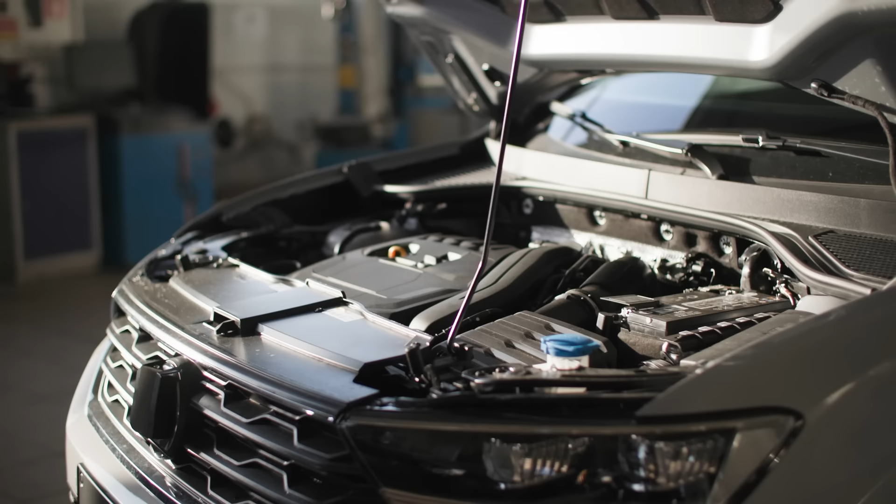Most drivers don't realize this, but engines hold grudges. Everyday habits, like stomping the gas, aren't just bad, they're brutal. Over time, these little mistakes can cause big damage. Skipping maintenance? That's practically asking for trouble.

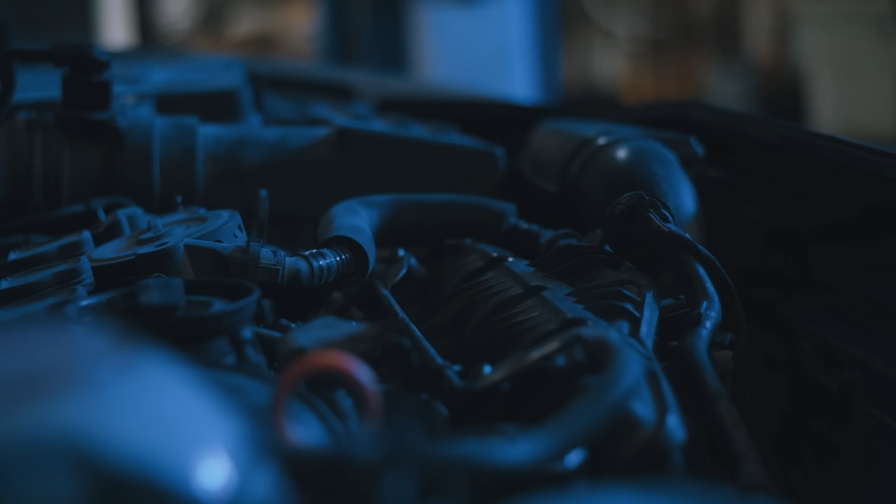We're diving into 9 habits that stress your engine. Each one might sound harmless, but the damage adds up fast. The good news? You can avoid them easily. Stick around until the end, and I'll even share a bonus tip. It's simple, effective, and could save your engine's life. Ready to break some bad habits?

Let's dive in. Habit number 1, running a motor low on oil or no oil at all. When oil levels get too low, parts of the engine don't get enough lubrication. This causes more wear and can shorten the engine's life. As the oil gets lower, the engine starts to overheat.

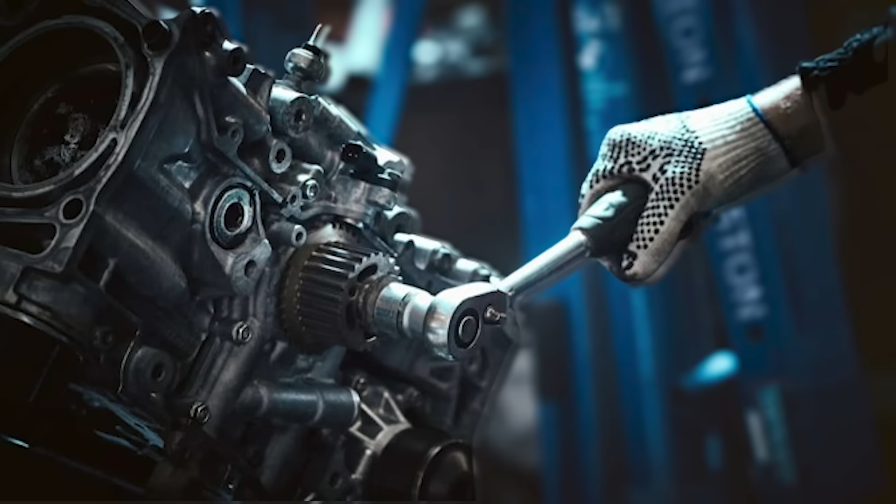If the oil reaches a critical temperature, it loses its ability to lubricate properly. That's when things get dangerous. The engine temperature spikes and the engine may seize. In worse scenarios, it causes parts to weld together. At that point, your engine is finished.

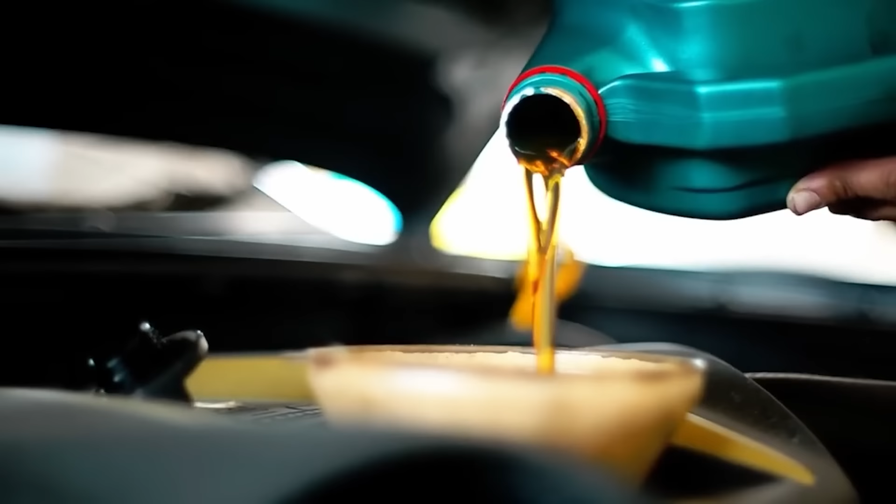Habit number 2, constant low RPM driving. Driving at low RPMs all the time, known as lugging the engine, can actually be pretty rough on it. When you're driving at low RPMs, especially with a heavy load, the engine doesn't get enough oil, coolant, or airflow to keep things cool and well lubricated.

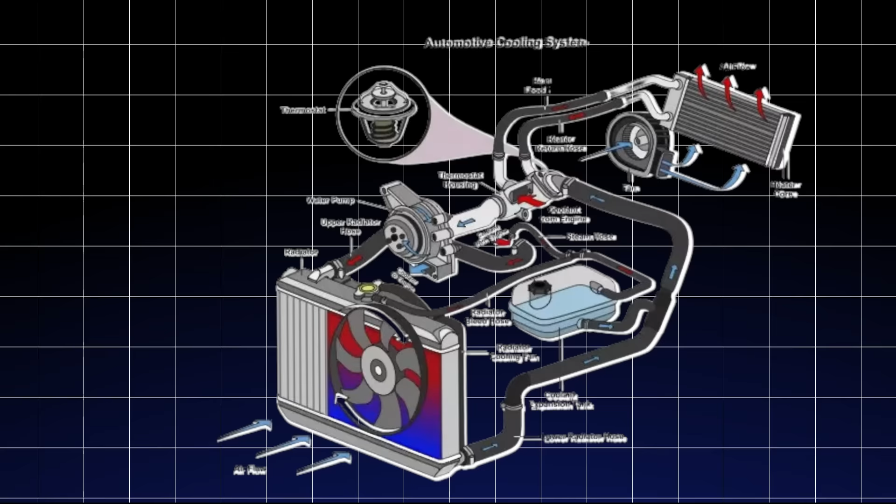That's because the oil pump, water pump, and fan all slow down at lower RPMs. And with less oil pressure and slower coolant flow, the bearings don't stay as protected and heat can start to build up. Now, if you're in stop-and-go traffic, a little low RPM driving is no big deal.

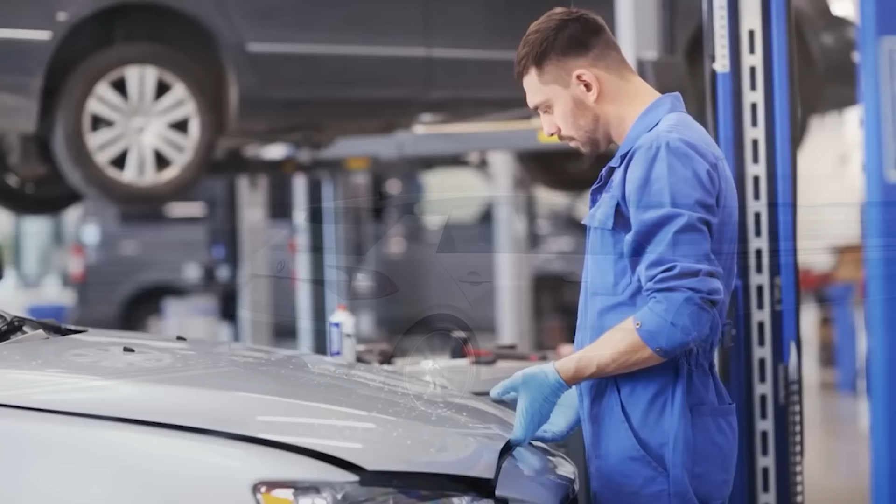Modern engines are built to handle it, and most cars have systems to help balance things out. But if you're regularly lugging the engine under a heavy load, it's best to avoid it. Your engine will thank you in the long run.

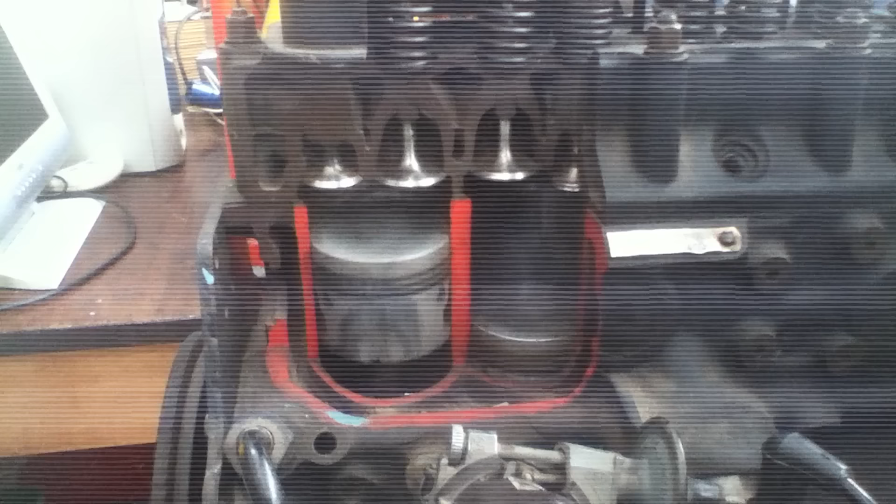Habit number 3, excessive engine braking. One big risk with engine braking is over-revving. Downshifting into too low a gear for your speed makes the engine spin faster than it should. This can cause serious damage, like floating a valve or even causing a piston to hit the valve, just like a timing belt failure, but faster.

Another issue is wear on your transmission synchros. Constantly downshifting to slow down puts more stress on the synchros than upshifting. So it's better to downshift once and stay in that gear as you slow instead of shifting down again and again. Rev matching can help a bit, but brakes are still better for regular slowing and stopping.

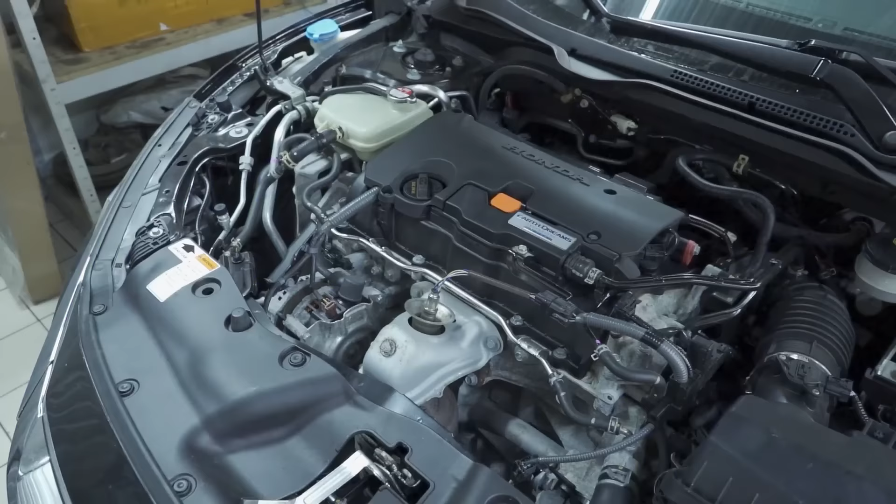Engine braking works well on long downhills to control speed. However, for everyday stops, stick to your brakes. They're cheaper and easier to replace than engine parts.

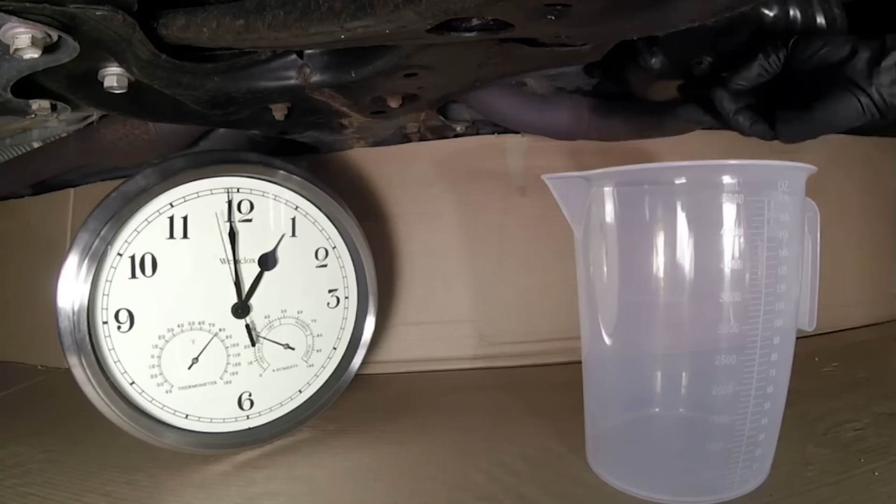Okay, let's move on. Habit number 4, revving an engine cold. Revving a cold engine can actually cause a lot of damage if it hasn't had a chance to warm up first. When the engine's cold, the oil inside is also cold and thick. This means it doesn't move as smoothly or reach all the parts that need lubrication.

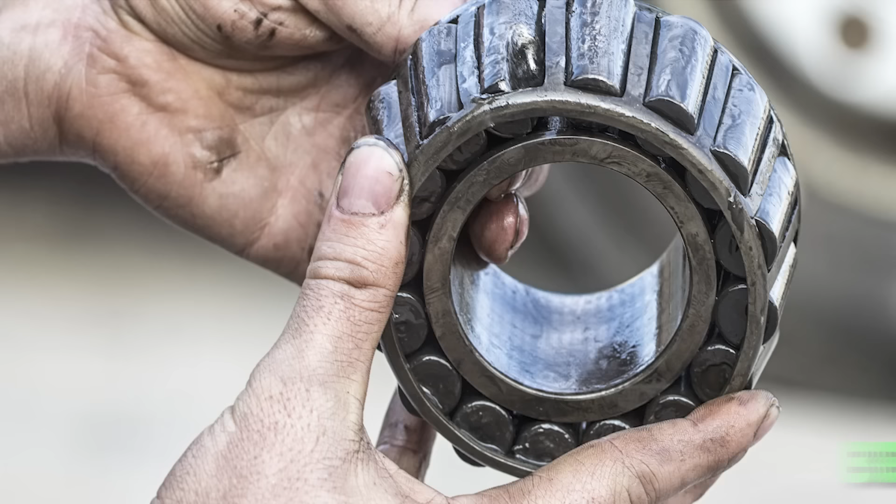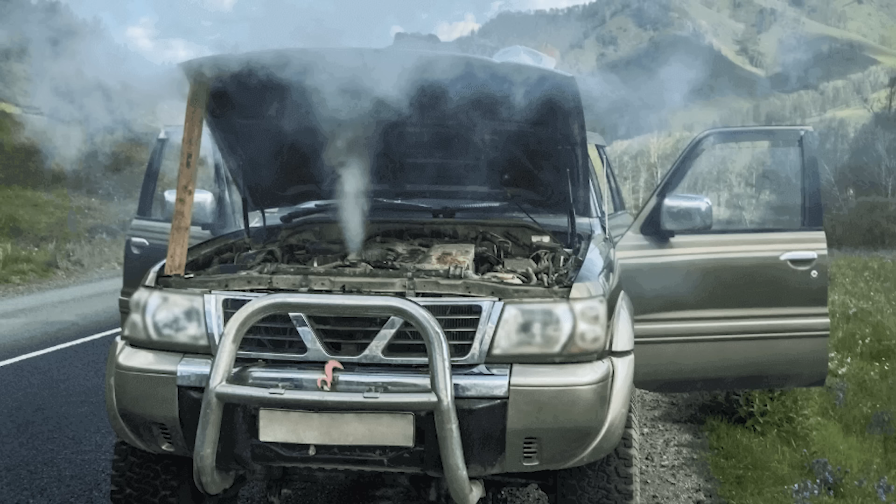If you rev the engine too soon, key parts like the pistons and bearings aren't getting the lubrication they need, and then extra wear, or even serious failure. A common mistake is to look at the coolant temperature gauge and think, the engine's warm enough. But here's the thing, oil heats up more slowly than coolant, so even if the coolant is warm, the oil might still be too thick to protect the engine.

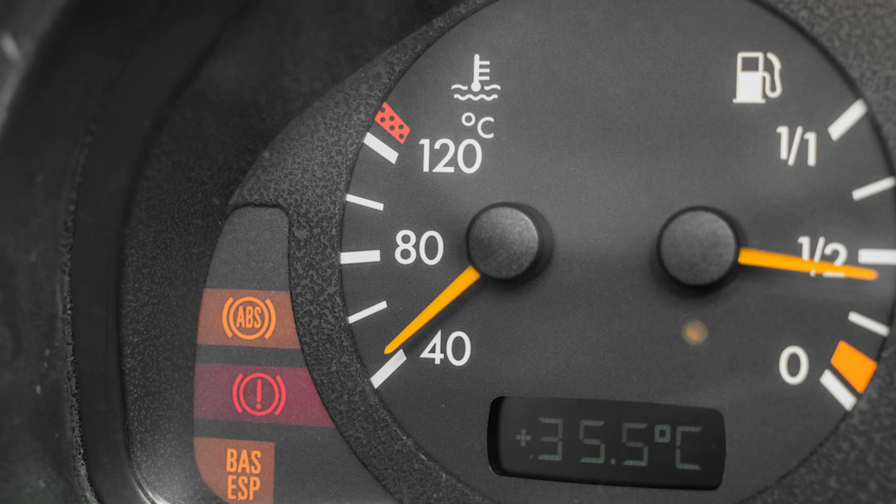Years back, some cars had an oil temperature gauge to show when it was truly safe to rev. So, let the engine warm up naturally. It'll save you from expensive repairs and keep things running smoothly.

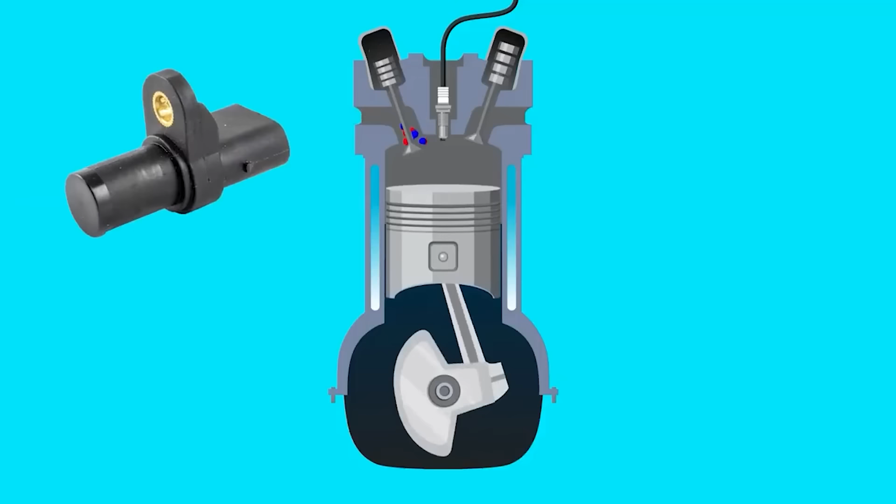Habit number 5, high gear acceleration. Accelerating hard in high gear or pushing the RPMs too high too often can really wear down your engine. Now, if you floor it once in a while, that's fine. Cars are made to handle some bursts of power, but when you're constantly driving with the pedal to the floor, it puts a lot of extra stress on parts like the crankshaft bearings.

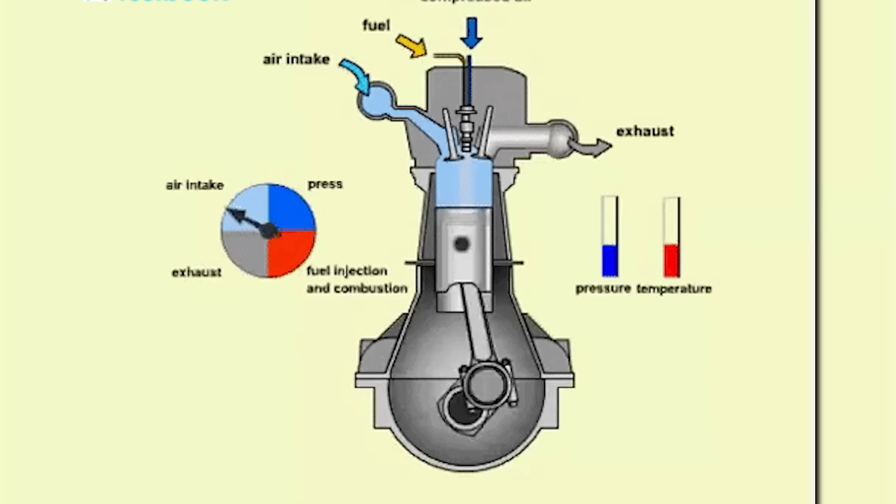Over time, this can lead to premature wear and even failure. Modern engines do have electronic governors, so they'll limit the RPMs before things get too dangerous. Still, pushing your engine to its max RPM again and again adds extra cycles that can shorten its life, even if you're not actually over-revving.

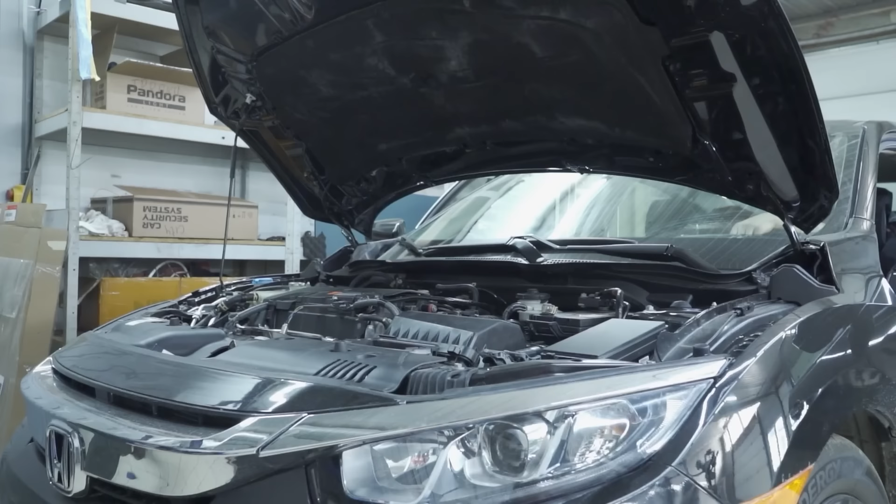For a good balance between performance and longevity, it's best to stick to moderate revs. Not only does it keep your engine healthier, but it's also more fuel efficient. Save those hard accelerations for when you really need them. Habit number 6, ignoring fluid leaks.

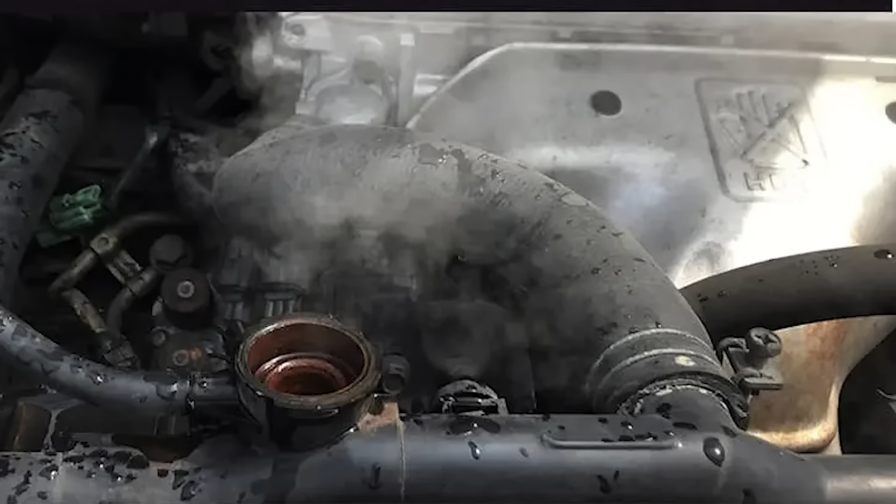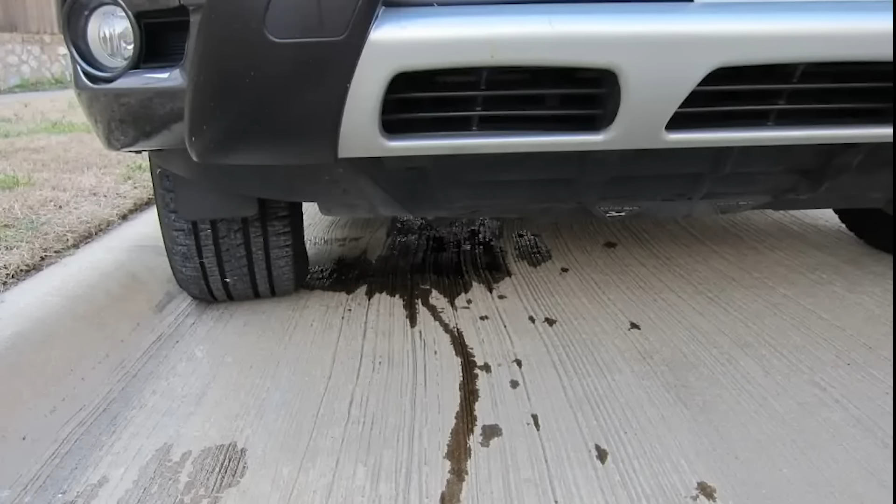Every type of leak has its own risks, and none should be ignored. Take a coolant leak, for example. It can make your engine overheat and fail. An oil leak? That can damage your engine and even start a fire if the oil lands on something hot, like the exhaust. Brake fluid leaks are even worse. They reduce your ability to stop, creating a huge safety risk.

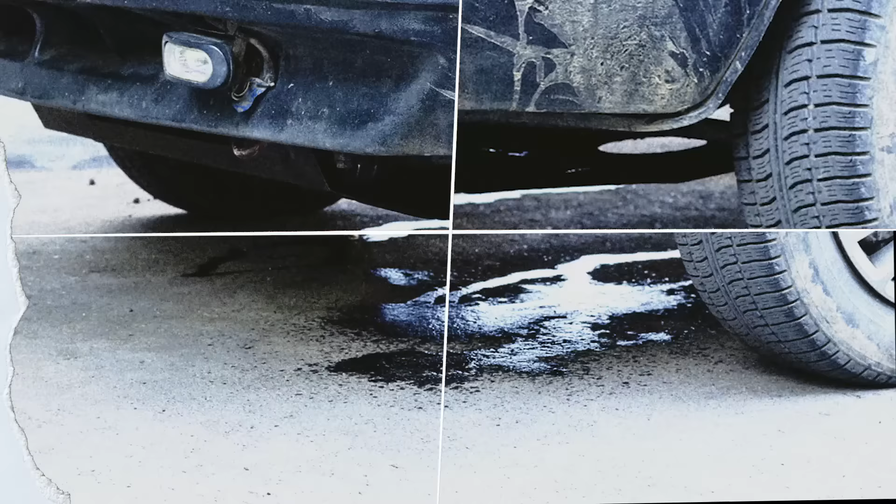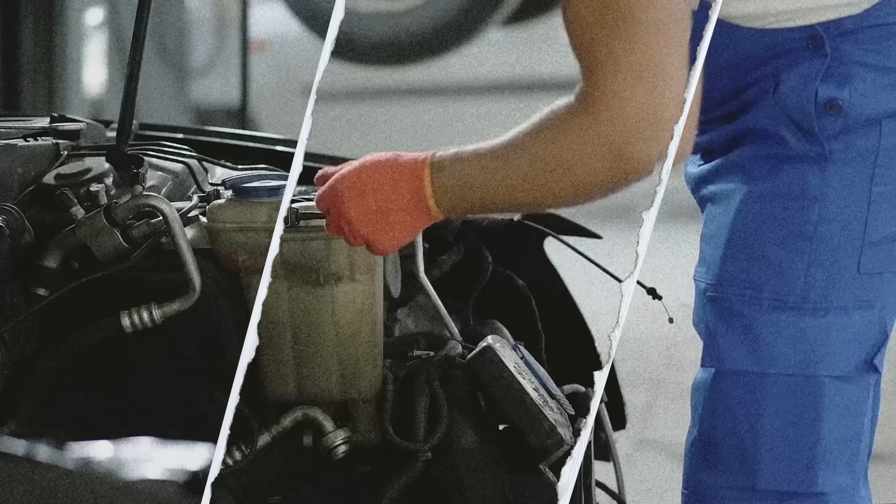Then there's transmission fluid. A leak there can lead to major transmission damage. And let's not forget, all leaks make the road slippery, putting other drivers at risk. Even a small leak that just dirties your driveway can turn into something much bigger and more expensive if left unchecked. If you notice a leak, don't wait. Get it checked by a mechanic right away.

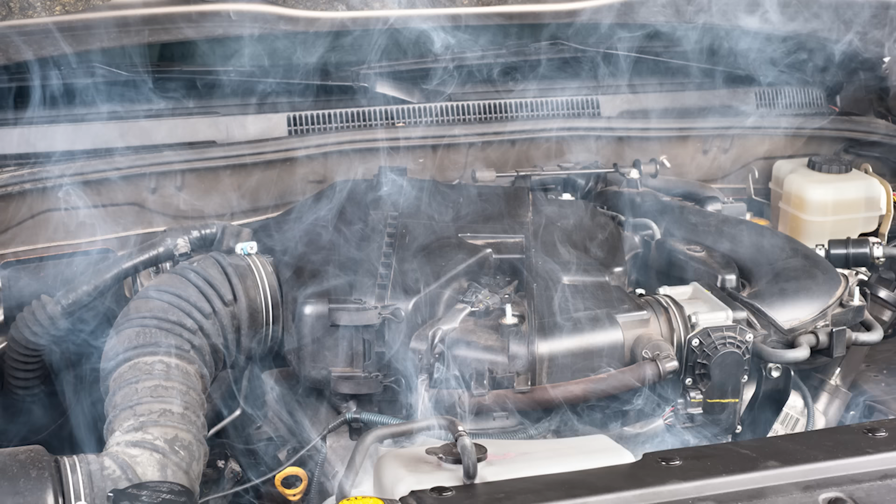Often, it's as simple as cleaning the engine bay and fixing the source early. Ignoring it could lead to complete engine failure or other costly repairs. Think of it like your body. If you don't have enough blood, your body shuts down. Without enough oil, your engine will seize and fail. This leads to costly repairs, or worse, a full replacement.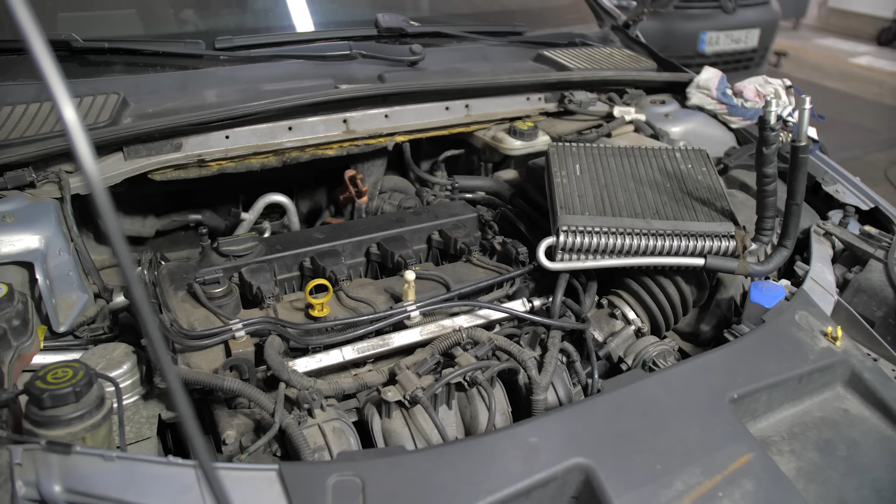Habit number 7, ignoring overheating. Heat is an engine's worst enemy. It can warp cylinder heads and cause oil burning, misfires, and a loss of power. Another common problem is busted hoses, which allow coolant to leak. You'll have a mess in the engine compartment and potentially damage other components.

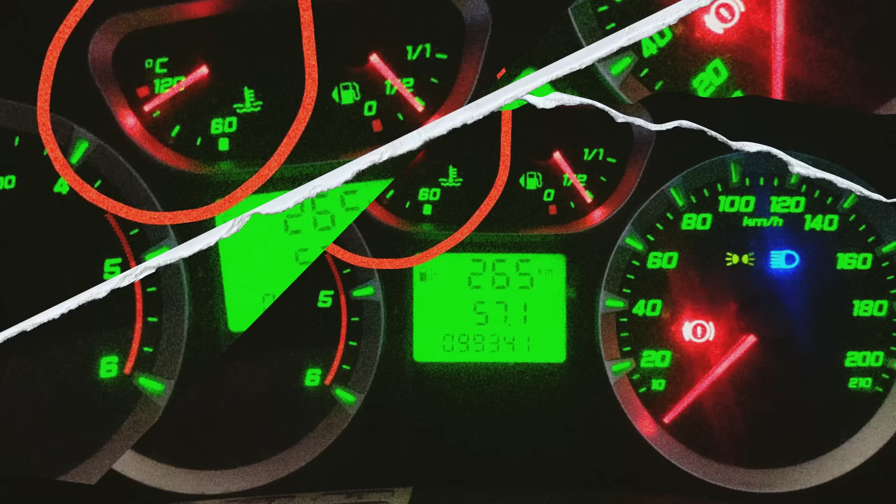A major overheat can even cause a blown head gasket. This mixes coolant and oil, which severely damages the engine. If you see thick white smoke from the exhaust, that's a sign of this problem. You can spot overheating by looking at the temperature gauge or seeing a warning light. A moderate overheating will make the coolant boil over.

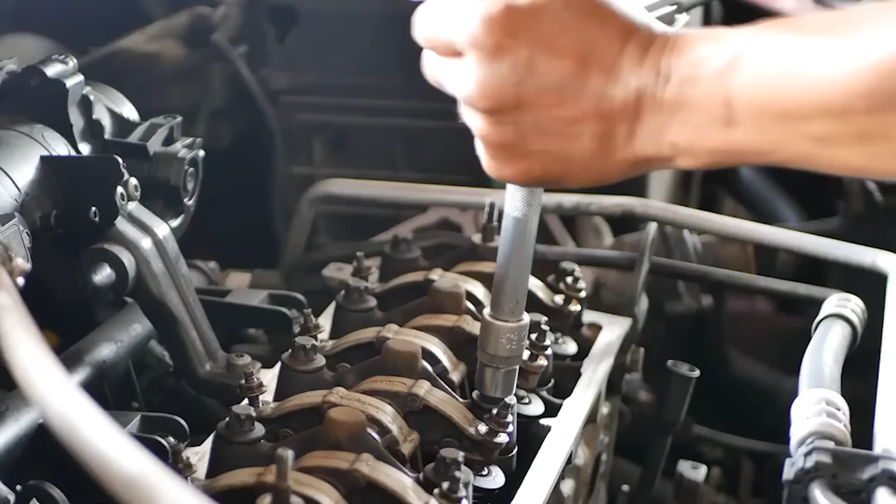Severe overheating can seize the engine and leave you with costly repairs or a full engine replacement. If your engine starts to overheat, pull over immediately and get your vehicle towed to avoid further damage. Even a short drive could be the difference between a simple fix and a complete engine rebuild.

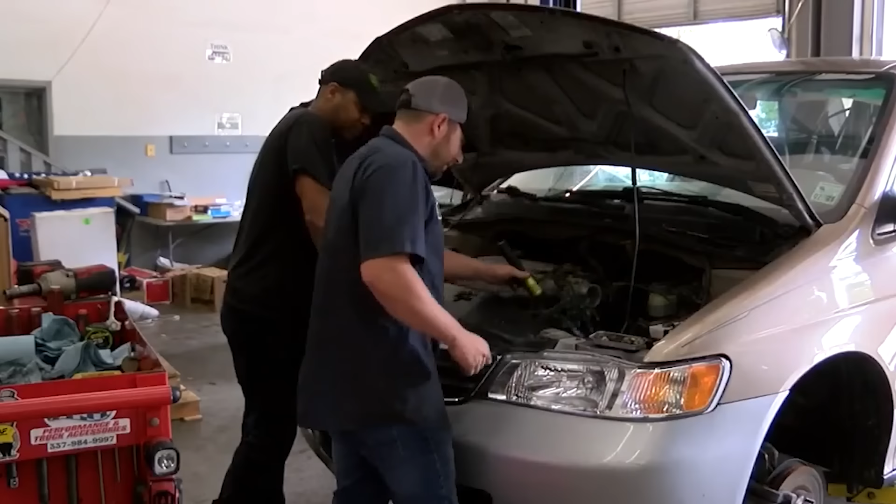If water enters the intake, it's going to flood the engine and cause it to shut down immediately. And this isn't the same as being flooded with fuel. It's much worse because water can damage the engine's internal parts. Off-road vehicles often have a raised air intake, known as a snorkel. It allows them to drive through deeper water by keeping the intake elevated and dry.

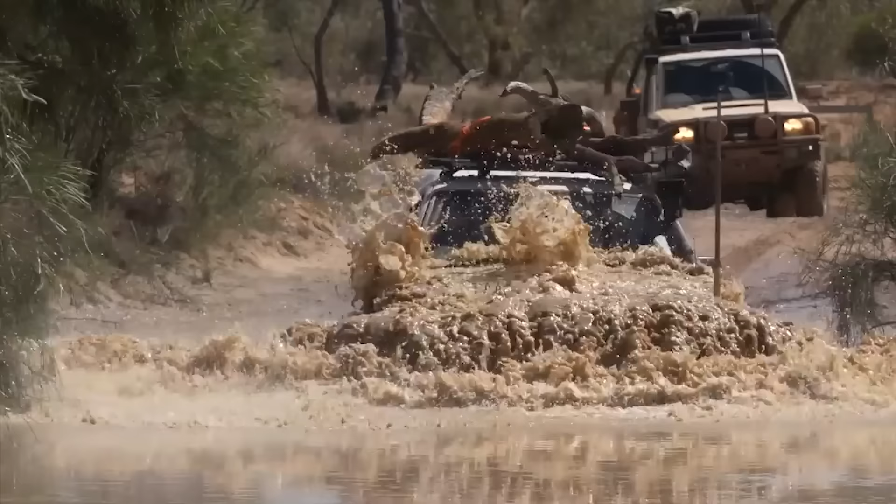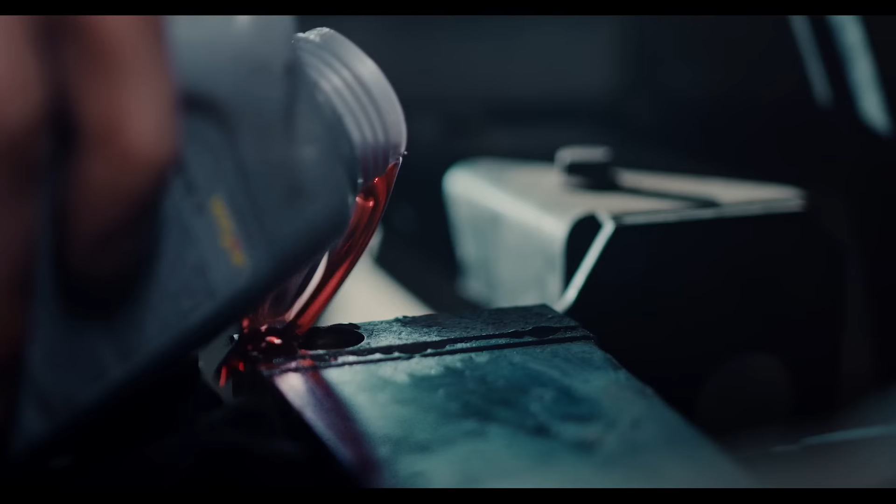Habit number 9, skipping regular maintenance. If you delay oil changes, the oil gets thin and turns into sludge. This sludge can't properly lubricate the engine, and then the car parts wear out faster, and in some cases, the engine could seize. The same goes for transmission oil.

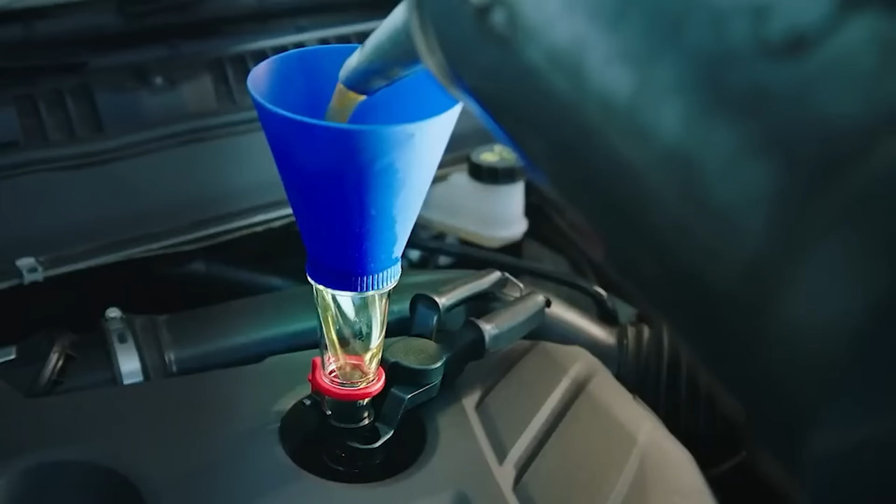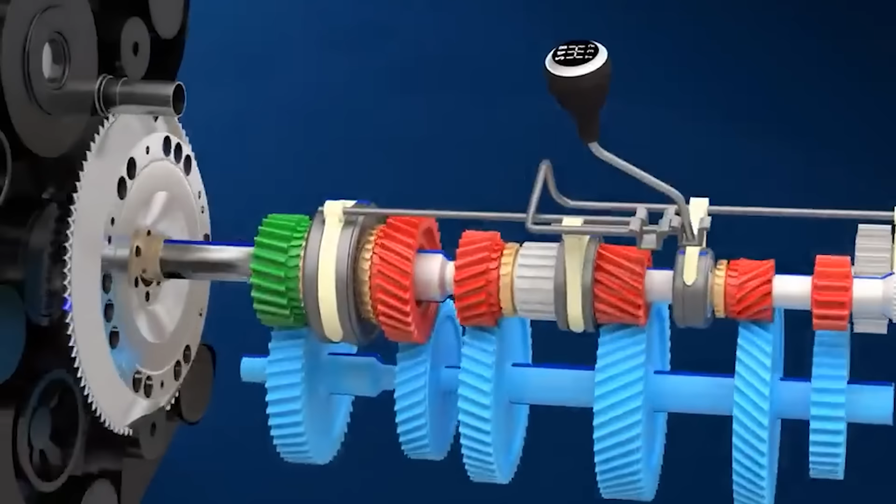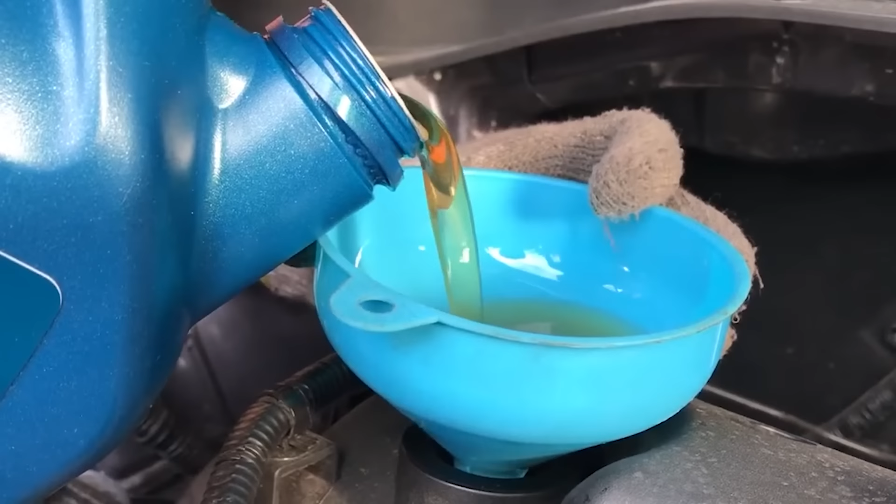If you skip those changes, the oil breaks down, losing its ability to keep the transmission cool and lubricated. Your car's transmission will slip, overheat, or even fail to engage a gear. In some cases, you might lose a gear altogether. Both engine and transmission problems are expensive to fix. So, keep up with routine maintenance like oil changes. It's a small effort that can save you from costly repairs down the road.

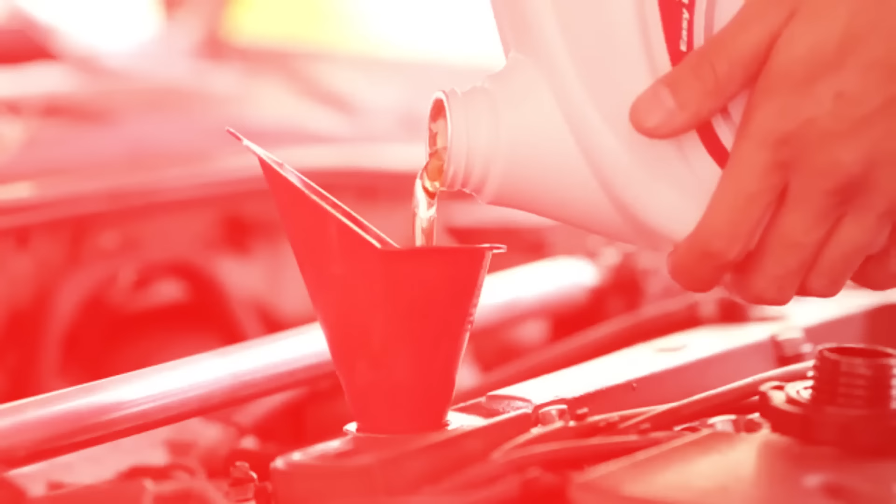Bonus tip: Could an engine oil additive save your engine? Here's a secret most drivers don't know. Adding an engine oil additive can work wonders for your car. It boosts your oil's ability to protect your engine, reducing wear and tear as you drive. It's like giving your oil a superhero upgrade.

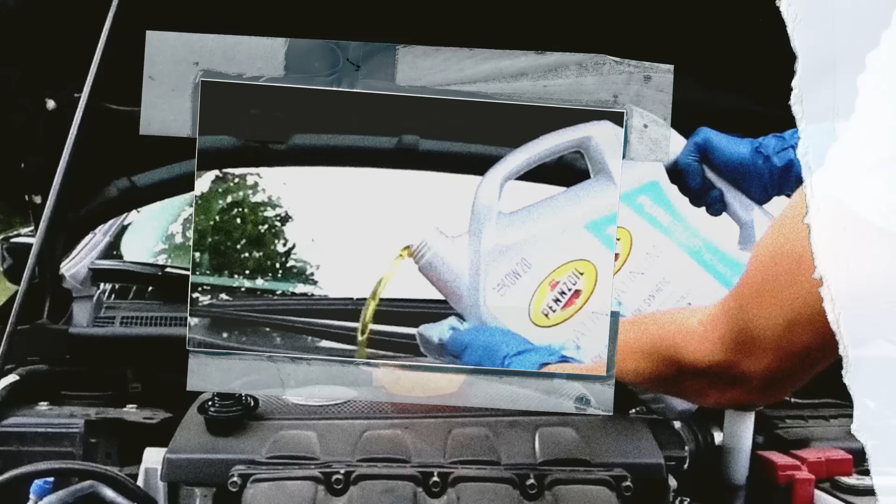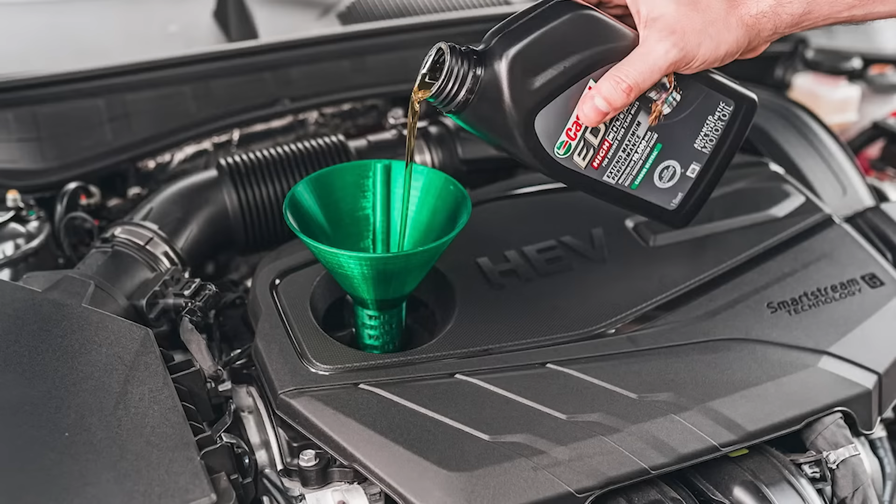Additives improve how well your oil handles extreme heat or cold, making sure your engine stays protected in any condition. Some even improve fuel efficiency and lower emissions. The best part? Using one is easy. Just pour it in during your next oil change. It's a small step with big benefits for your engine and your wallet.

Your engine is the heart of your car, and avoiding these bad habits can save you thousands in repairs and extend its lifespan. Treat it well, and you'll enjoy better fuel efficiency, fewer breakdowns, and a smoother driving experience.